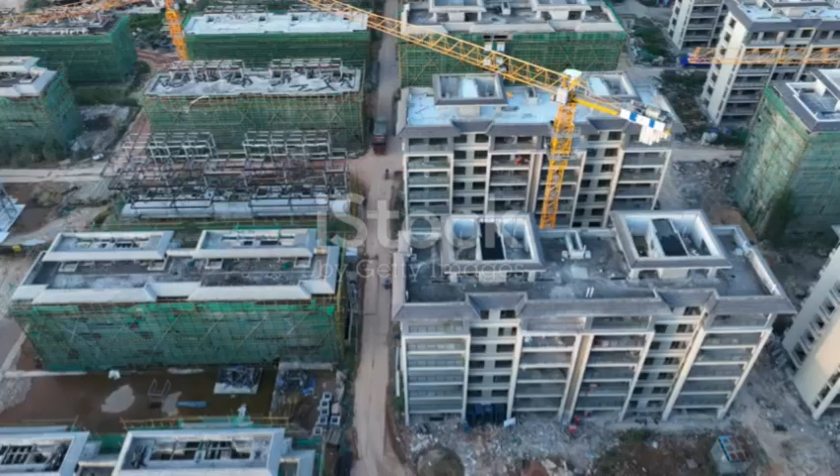Have you ever looked at a towering skyscraper or a massive bridge and wondered, how on earth did they build that? It's a brilliant question, and honestly, the answer is all around us. It's called construction engineering. This isn't just about mixing cement or laying bricks. It's really the science and art of turning an idea on a piece of paper into a solid, safe, and useful structure that we can all live in, work in, or drive across.

It's the grand plan that ensures our buildings don't fall down, our bridges don't wobble, and our homes keep us warm and dry. Construction engineering is the invisible force that shapes the world we see every single day, from the smallest house on your street to the biggest stadium in the country.

Think of it like a massive, incredibly complex recipe. Before a chef even thinks about turning on the oven, they need a detailed list of ingredients and a step-by-step guide. Construction engineers are the master chefs of the building world. They figure out exactly what materials are needed, how strong they must be, and the precise order in which everything must be put together. They work with architects, who design how a building looks, to make sure that beautiful design is also strong and practical.

They are the problem solvers who make sure a vision becomes a reality, safely and efficiently, ensuring that every single part works in perfect harmony with the rest. Without these clever engineers, our cities would look very different. We wouldn't have the incredible structures that define our skylines or the essential infrastructure that makes our lives easier. Every road, tunnel, dam, and airport is a testament to their skill.

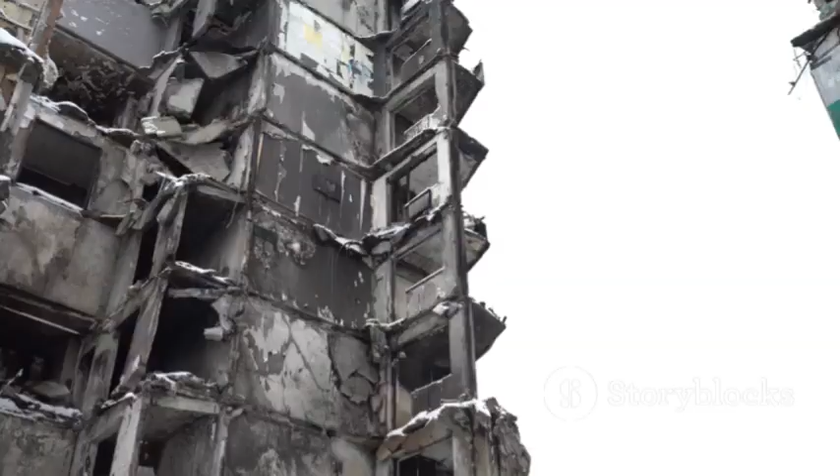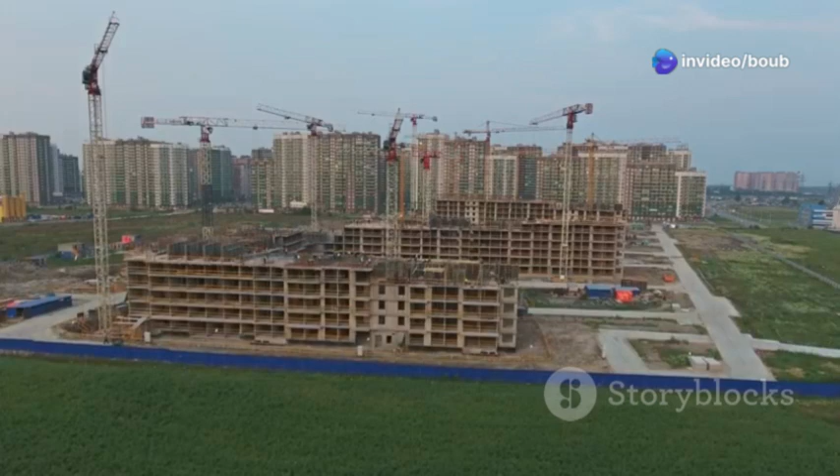So, why is this so important? Well, imagine a world without it. We'd be living in structures that might not withstand a strong gust of wind or a heavy downpour. Our cities couldn't grow upwards, and we wouldn't have the complex networks that supply us with water and power. Construction engineering is the backbone of modern civilization. It provides the safe and reliable framework for our society to function and flourish.

It's the essential link between a brilliant idea and a physical, lasting legacy. It allows us to build bigger, safer, and more ambitious projects than ever before, constantly pushing the boundaries of what is possible.

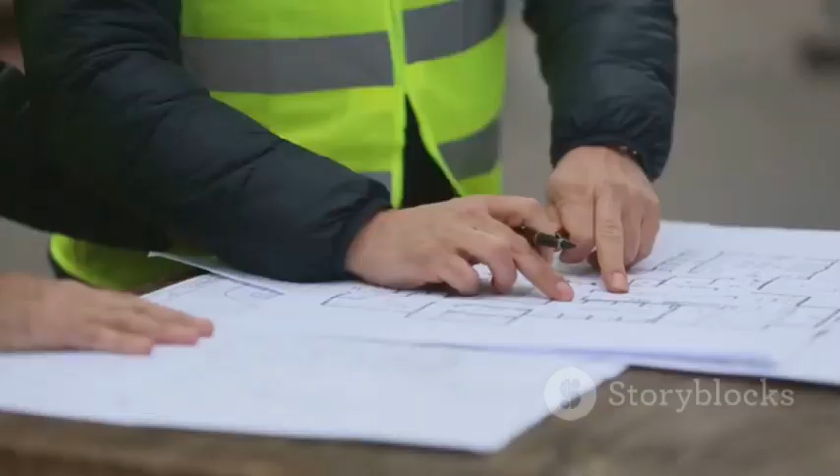Before a single shovel hits the dirt, a building has already been built many times over, but not with steel and concrete. It's built with data, lines, and pixels. This is the planning and design stage, the crucial first step where every single detail is meticulously thought out. Traditionally, this was all done with enormous sheets of paper covered in complex lines and numbers, known as blueprints or engineering drawings. These drawings are like the building's DNA, containing all the information needed to construct it.

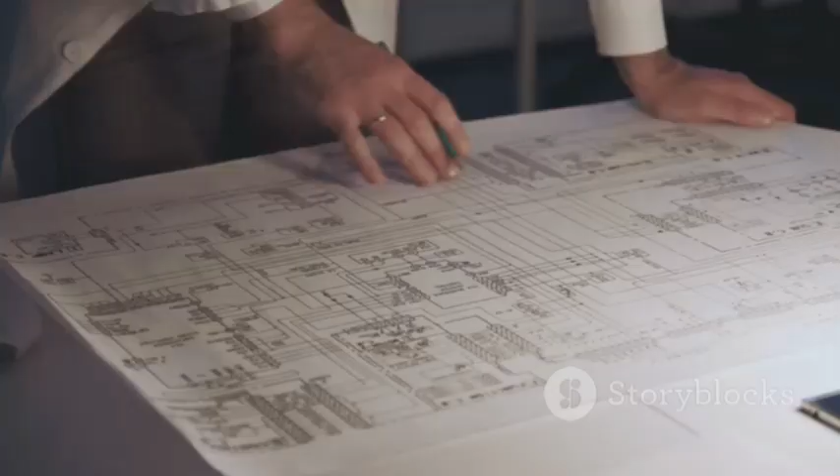They show the exact dimensions of every room, the position of every door, and the thickness of every wall. It's a universal language that all construction professionals understand. These drawings are incredibly detailed. There isn't just one master plan. There are many different sets. One set will show the architectural design, the look and feel of the building.

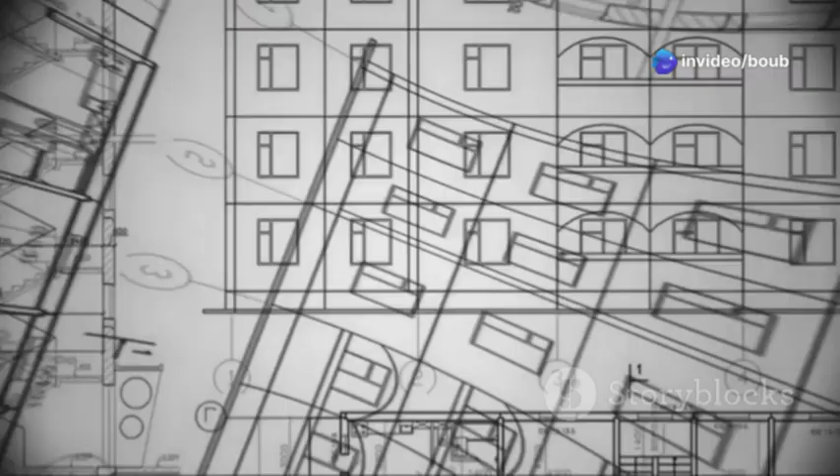Another set, created by structural engineers, will detail the skeleton of the building, the columns and beams that hold it up. Then there are drawings for the electrical systems, the plumbing, and the heating and ventilation. Each drawing is a layer of information, and when you put them all together, you get a complete picture of the final product. It's a painstaking process that requires immense precision, as a tiny mistake on paper could become a huge, expensive problem on the construction site.

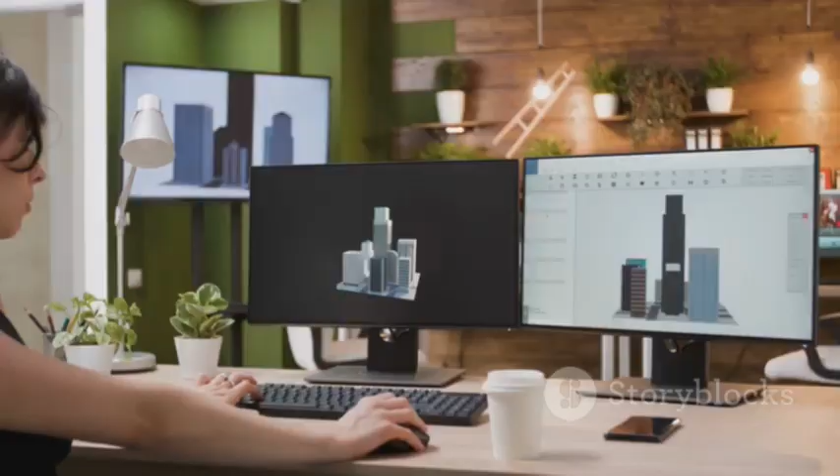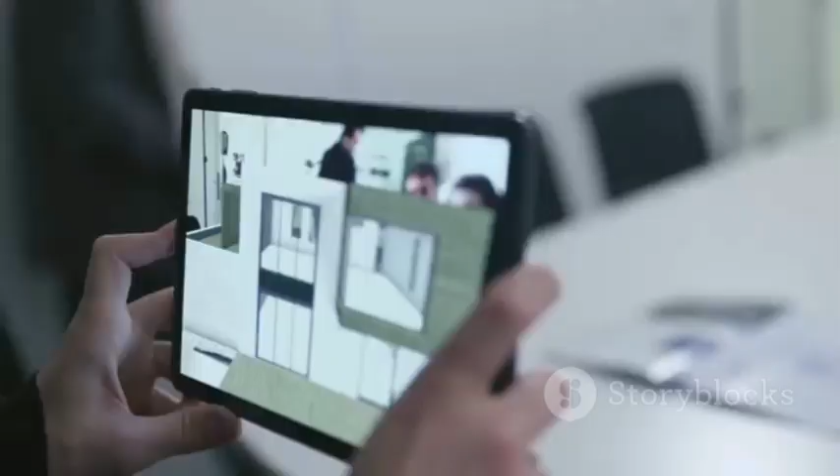But today we have something even better than paper. We have the magic of three-dimensional technology. Instead of trying to imagine a three-dimensional building from flat, two-dimensional drawings, engineers can now create a fully interactive three-dimensional model on a computer. This is a game changer. It's like having a digital, transparent version of the building right in front of you. You can spin it around, look at it from any angle, and even zoom in to see how the tiniest components fit together.

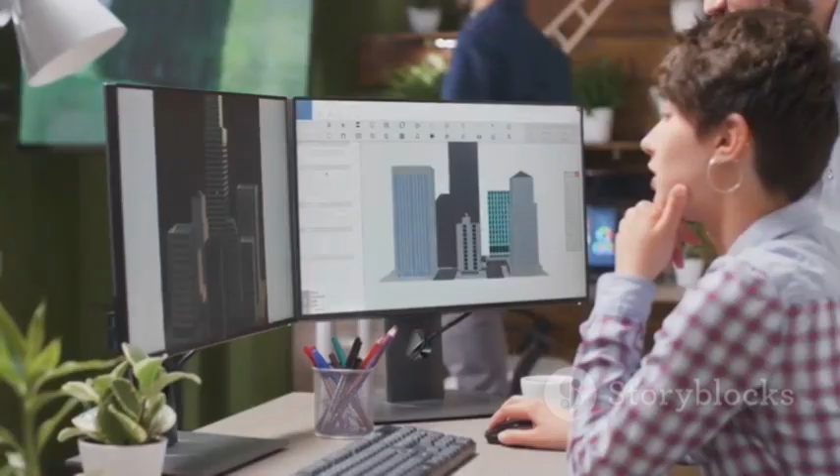This technology is often called Building Information Modeling, or BIM, and it has revolutionized the planning process. Using these three-dimensional models, engineers and architects can take a virtual walk through the building long before construction starts. They can check for any potential clashes, like a water pipe running through the same spot as an electrical conduit, a common problem that used to cause major delays. With a three-dimensional model, these issues can be spotted and fixed with just a few clicks of a mouse.

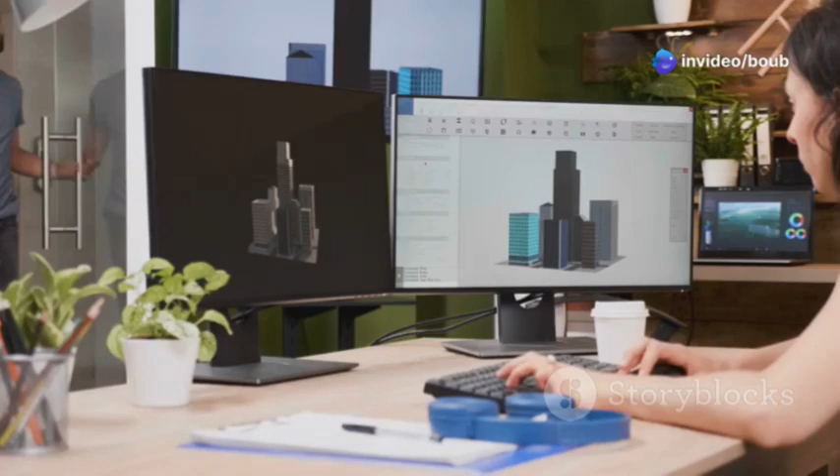It allows everyone involved in the project, from the client to the construction manager, to see exactly what the finished building will look like and how it will function. This incredible foresight saves time, reduces waste, and helps create better, more efficient buildings.

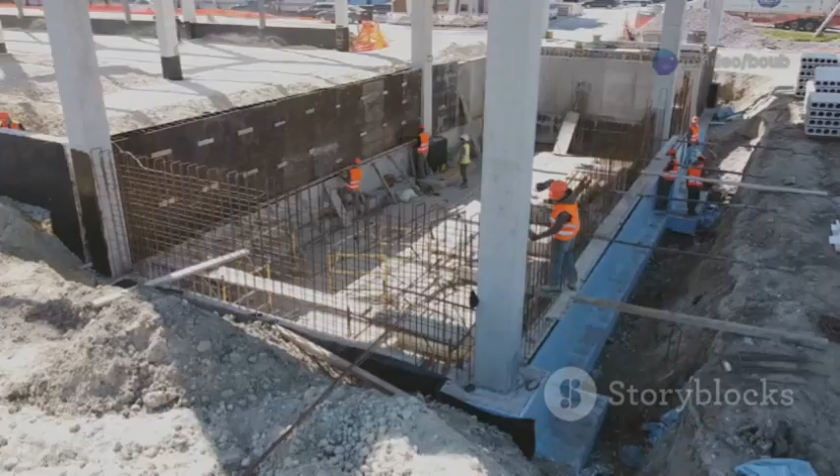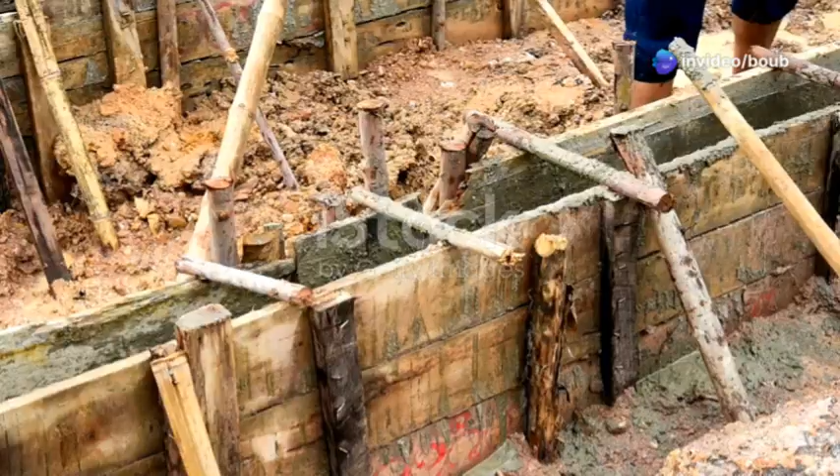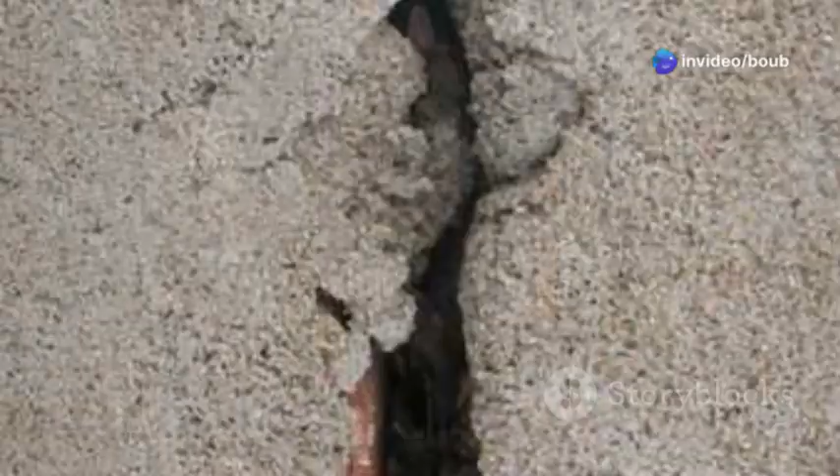Every great structure, no matter how tall or magnificent, relies on something you almost never see: its foundation. The foundation is the critical link between the building and the earth. Its job is to take the entire weight of the building, every floor, every wall, every piece of furniture, and every person inside, and transfer that massive load safely into the ground. If the foundation is weak, the entire building is at risk.

That's why engineers spend so much time studying the ground on which they are about to build. They take soil samples and conduct tests to understand its strength and stability, ensuring the ground can support the immense pressure. There are different types of foundations, and the one an engineer chooses depends on the size of the building and the type of soil.

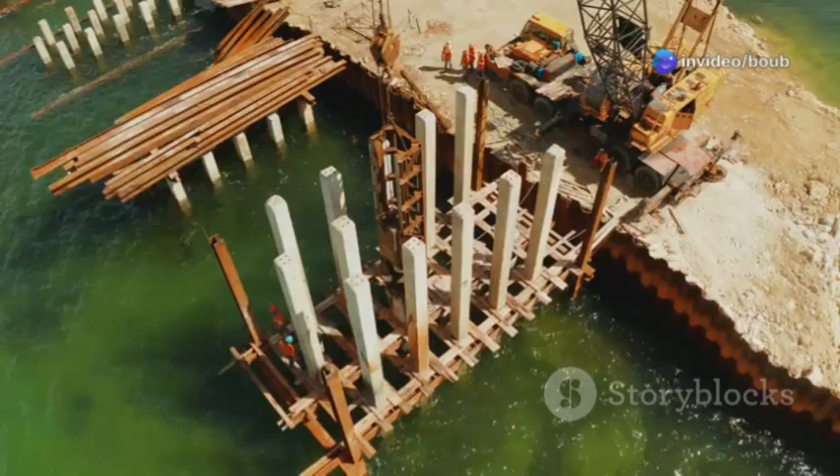For a typical house, you might have a shallow foundation, like a concrete slab or strip footings. These spread the weight of the house over a wide area, just like snowshoes help you walk on snow without sinking. But for a towering skyscraper, you need something much, much bigger. These giants require deep foundations, which act like long legs that reach deep into the ground until they hit solid rock or a very stable layer of soil. These are often made of massive concrete pillars called piles.

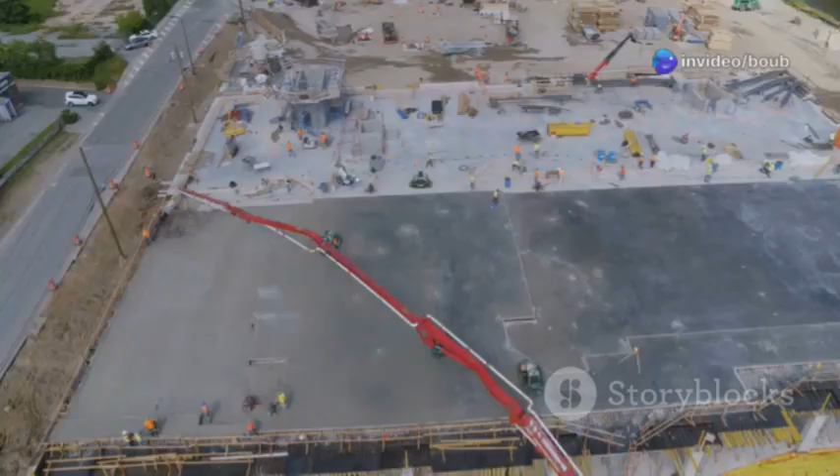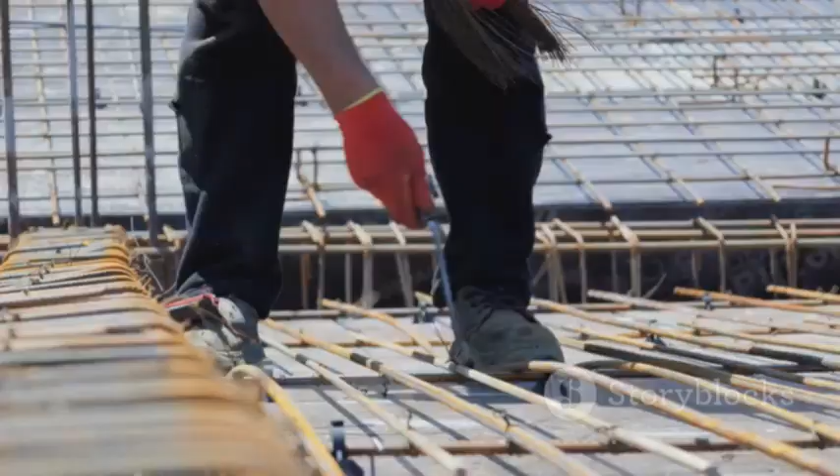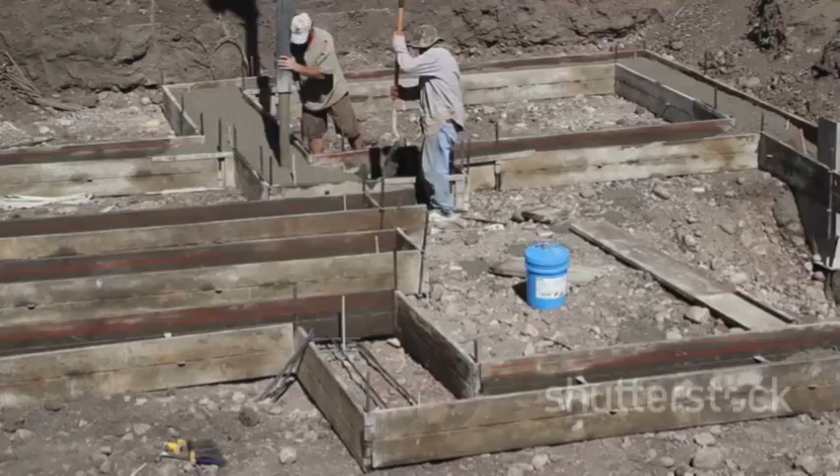The process of building a foundation is honestly a marvel of engineering. First, a large hole is excavated. Then, a strong cage of steel bars, known as rebar, is carefully assembled. This steel skeleton provides tensile strength, which is the ability to resist being pulled apart. Concrete, on the other hand, is incredibly strong under compression, or being squeezed. When you combine steel and concrete, you get reinforced concrete, a super material that is perfect for foundations.

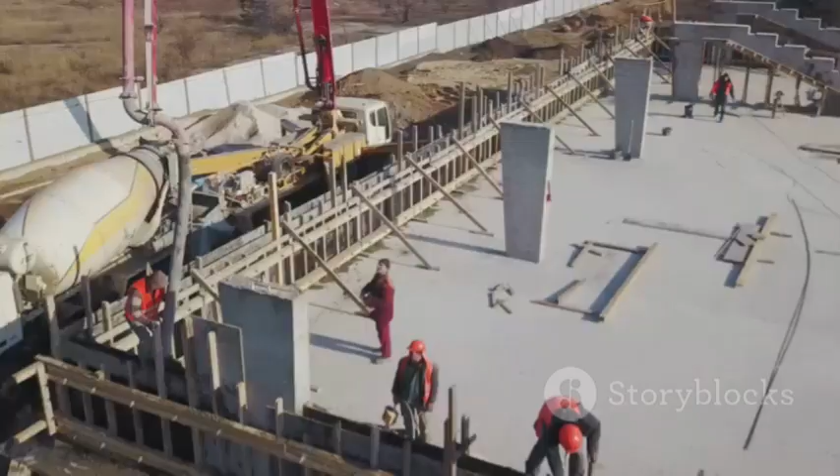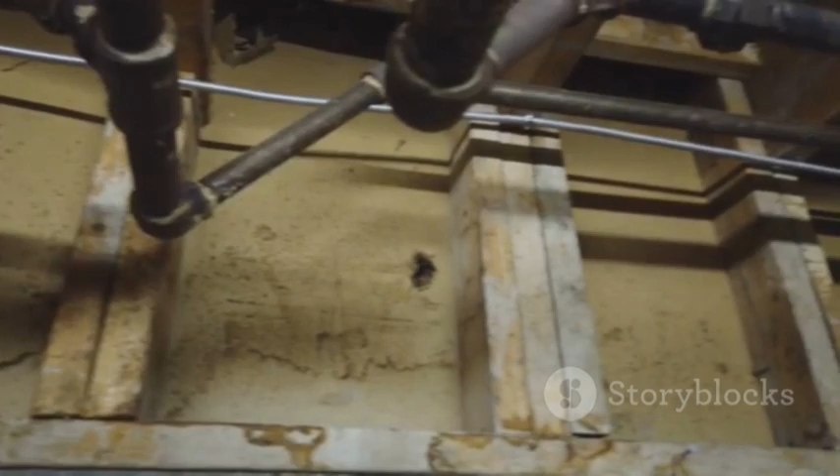Once the steel cage is in place, wet concrete is poured in and around it, filling every gap. The concrete then has to cure, a chemical process where it hardens and gains its immense strength. This stage is absolutely crucial, and there is no room for error. A poorly constructed foundation can lead to all sorts of problems later on, from cracked walls to an uneven building. It's the anchor of the entire project.

Think of the famous Leaning Tower of Pisa. Its iconic tilt is the result of a foundation that was too shallow for the soft ground beneath it. Modern construction engineers learn from these historical examples, using advanced calculations and soil analysis to design foundations that will stand firm for centuries. It's the unseen hero of every building, providing the solid, unwavering base upon which everything else is built.

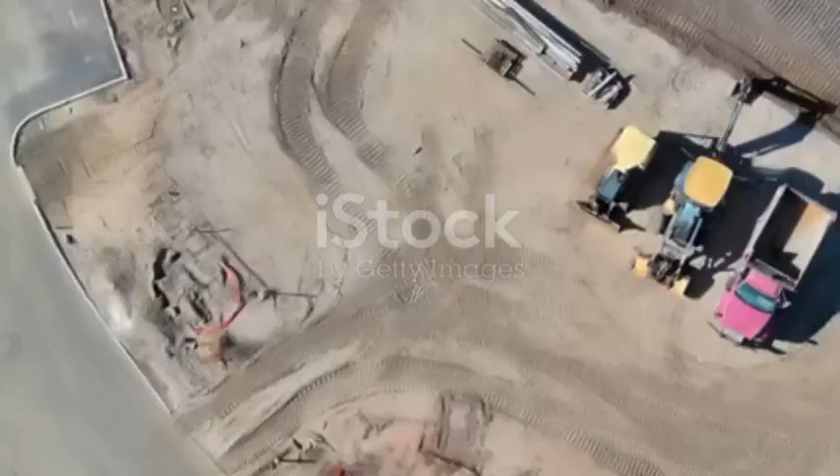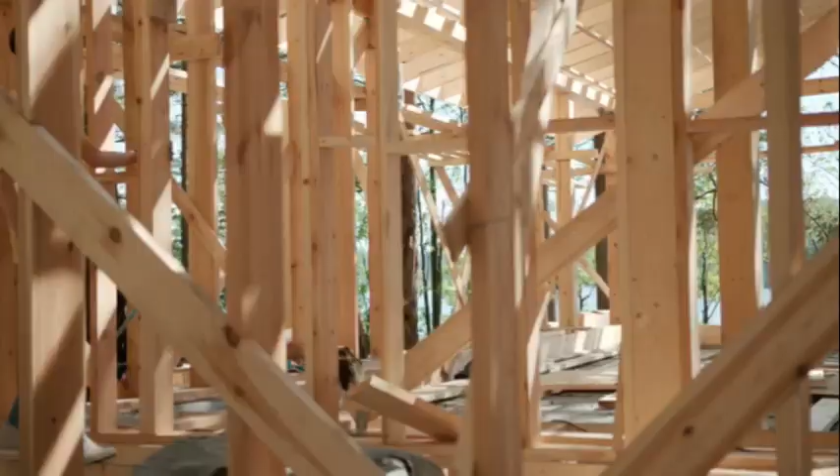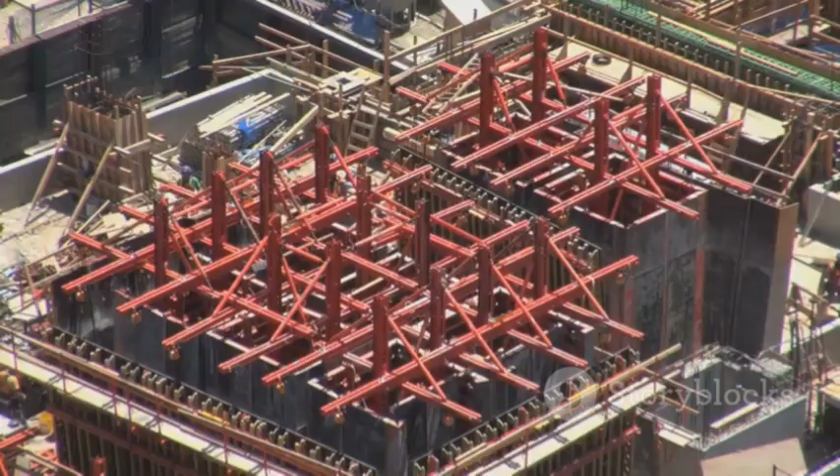Once the foundation is solid and ready, the building begins its journey upwards. This is where we see the skeleton of the building, its structural frame, take shape. This frame is the primary support system, responsible for holding the building up against gravity and resisting other forces like wind or even earthquakes. Just like our own skeletons support our bodies, the structural frame supports every floor, wall, and the roof. For most large buildings, this frame is made from two key materials, steel or reinforced concrete. The choice between them depends on the building's design, height, and the specific needs of the project.

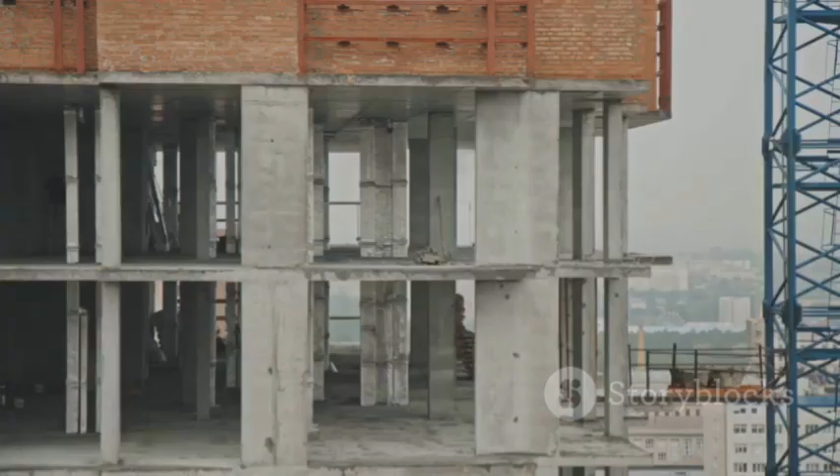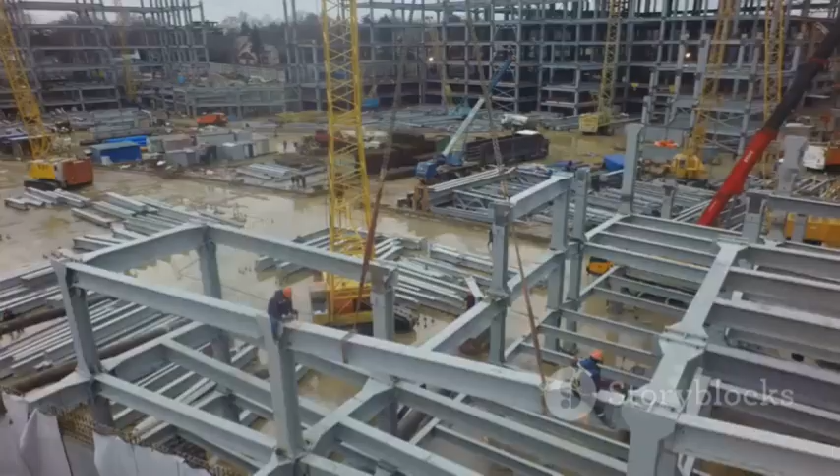The building blocks of this skeleton are columns and beams. Columns are the vertical pillars that stand tall, transferring the weight from the floors all the way down to the foundation. You can see them in large open spaces like parking garages or office building lobbies. Beams are the horizontal members that span between the columns. Their job is to support the weight of the floors and transfer that load sideways to the columns. Together, columns and beams form a grid-like structure, a strong and rigid framework that creates the shape of the building and the open spaces within it.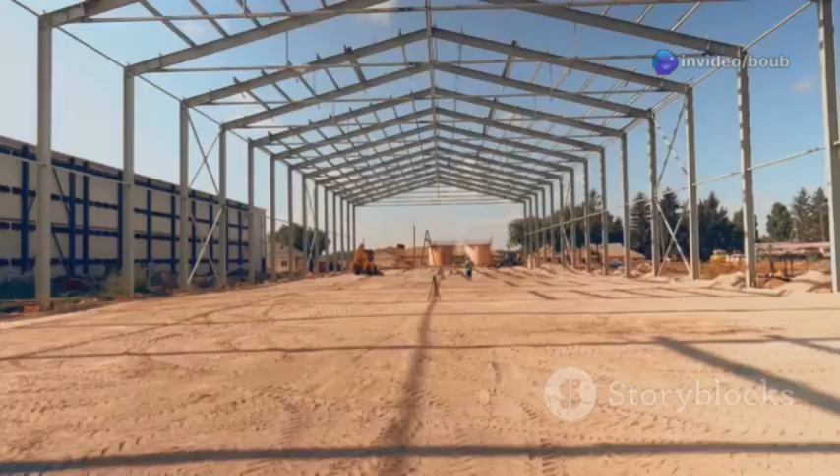It's a simple but incredibly effective system. The assembly process is kind of like putting together a giant high-tech construction set. If the frame is steel, massive steel beams and columns are manufactured in a factory to precise specifications. They are then transported to the site and lifted into place by towering cranes. Skilled ironworkers then bolt or weld these huge pieces together, working at incredible heights with amazing precision.

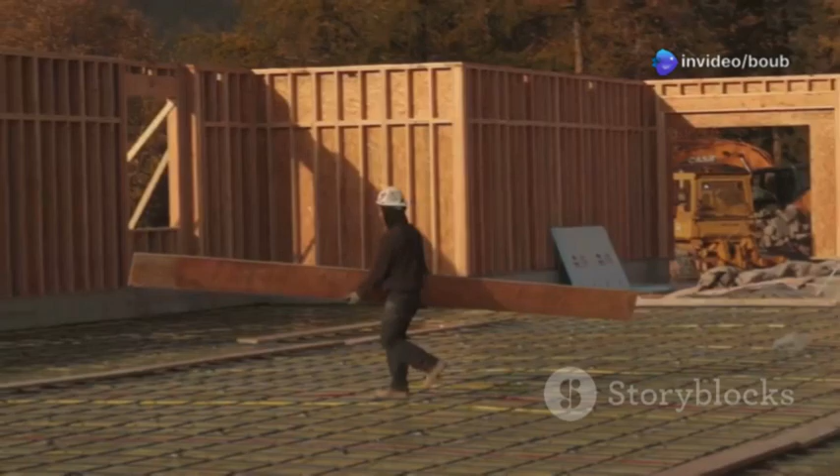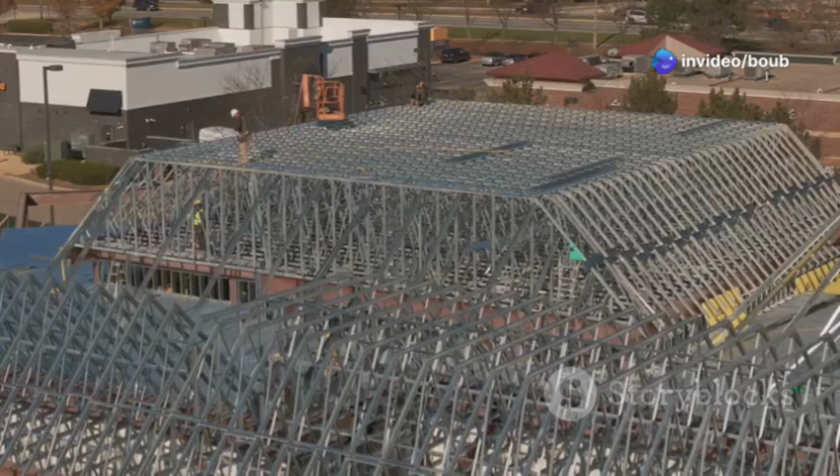If the frame is reinforced concrete, wooden or metal molds called formwork are built on site. Steel rebar cages are placed inside the formwork, and then concrete is pumped in. Once the concrete cures, the formwork is removed, revealing a solid column or beam. This stage of construction is often the most dramatic. It's when the building grows rapidly, and you can finally see its size and shape emerging from the ground.

Engineers use highly detailed three-dimensional models to plan the exact sequence of this assembly. They can simulate the entire process on a computer, ensuring that each piece fits perfectly and that the structure remains stable at every stage of construction. This careful planning is essential for safety and efficiency, making sure that the building's strong and resilient skeleton is built correctly, piece by piece, as it reaches for the sky.

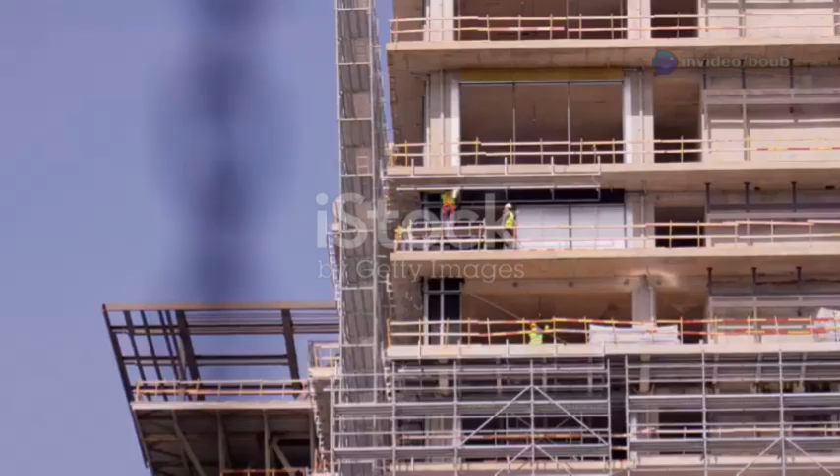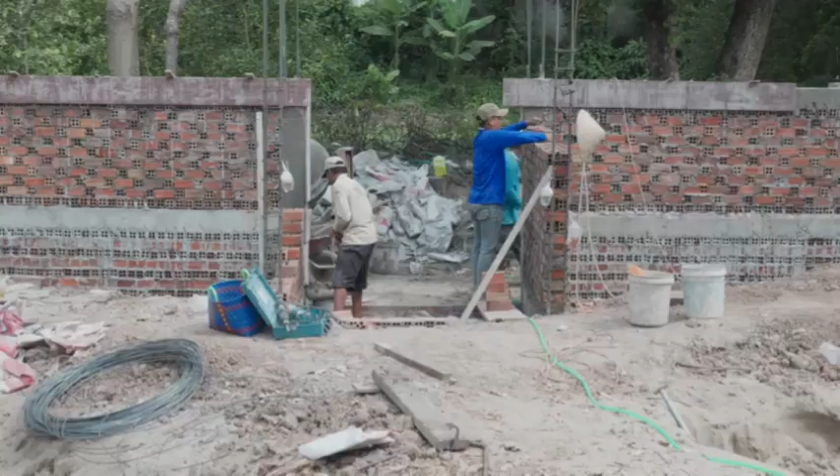With the sturdy skeleton of the building in place, it's time to give it some skin. This is where walls come in. We often think of walls as simple dividers that create rooms, but in construction engineering they play several vital roles. There are two main types of walls: load-bearing walls and non-load-bearing walls. Load-bearing walls are part of the building's structural system. Just like columns, they help to carry the weight of the floors and the roof above and transfer it down to the foundation. In many smaller buildings, like houses, the exterior walls are often load-bearing, made from materials like brick, concrete blocks, or reinforced concrete.

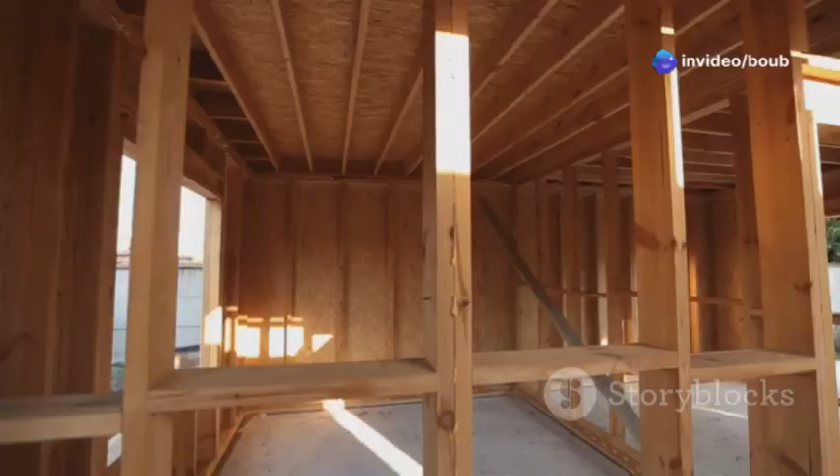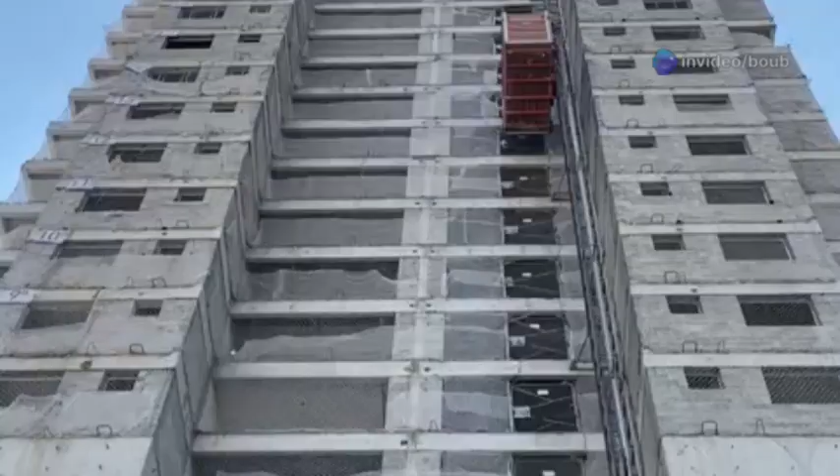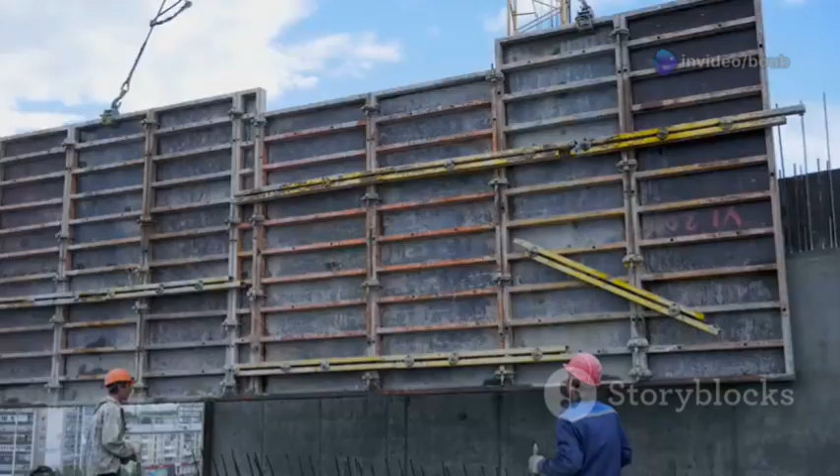Non-load-bearing walls, on the other hand, are primarily there to define spaces. They don't carry any weight from the structure above them. They only have to support their own weight. These are often the interior walls that separate your living room from your kitchen or your bedroom from your bathroom. In large steel frame buildings, even the exterior walls are often non-load-bearing. These are called curtain walls. They are like a skin or a curtain that hangs off the structural frame, keeping the weather out and giving the building its finished look. These can be made of glass, metal panels, or precast concrete.

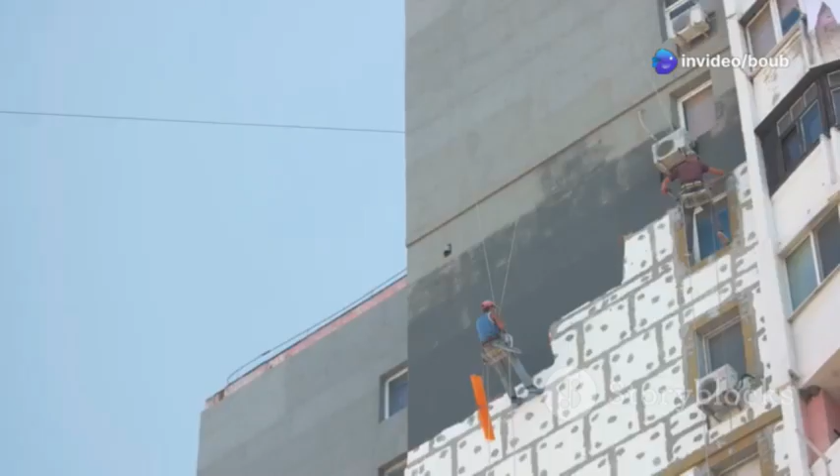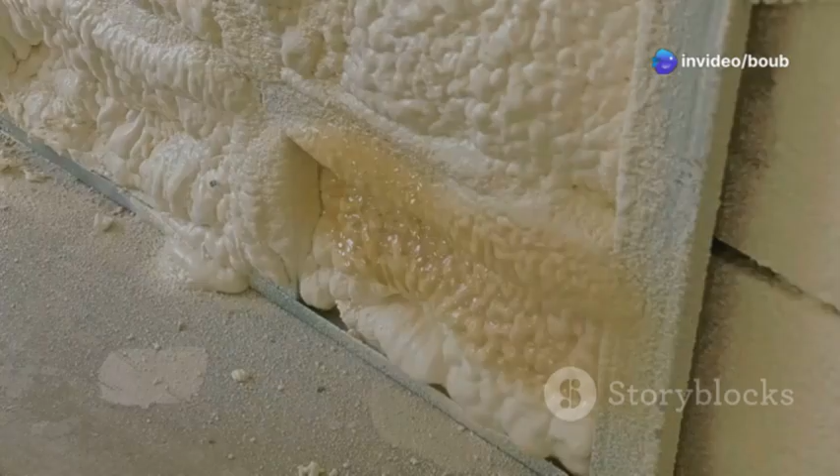But a wall is much more than just a single layer of material. Modern walls are complex, multi-layered systems designed for performance. The outer layer, known as the cladding, is the building's first line of defense against rain, snow, and wind. Behind that, there is often a weather-resistant barrier to stop any moisture that gets past the cladding. Then comes a thick layer of insulation, which is crucial for keeping the building warm in the winter and cool in the summer. This helps to make the building energy efficient, saving money on heating and cooling bills. It's like putting a warm coat on the building.

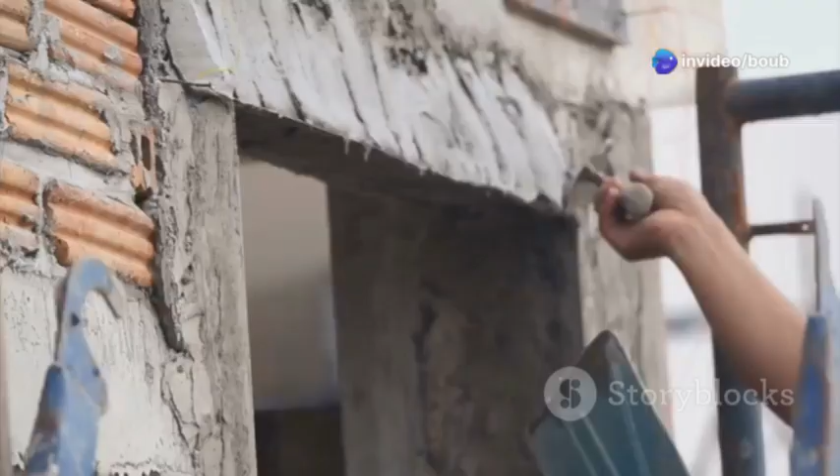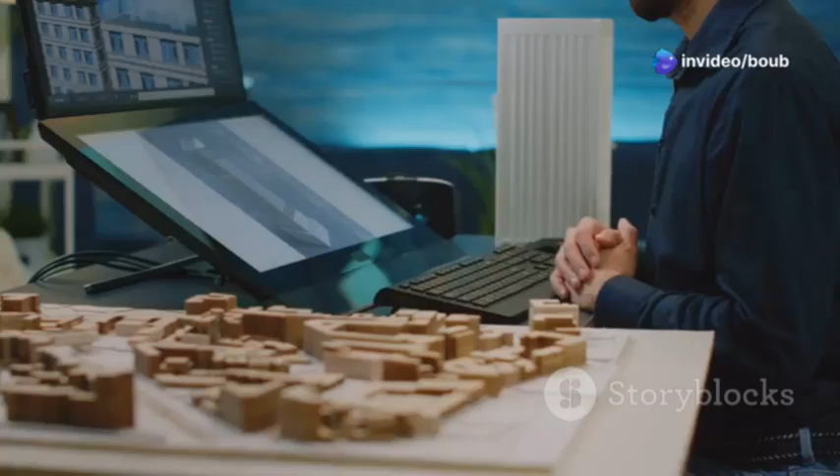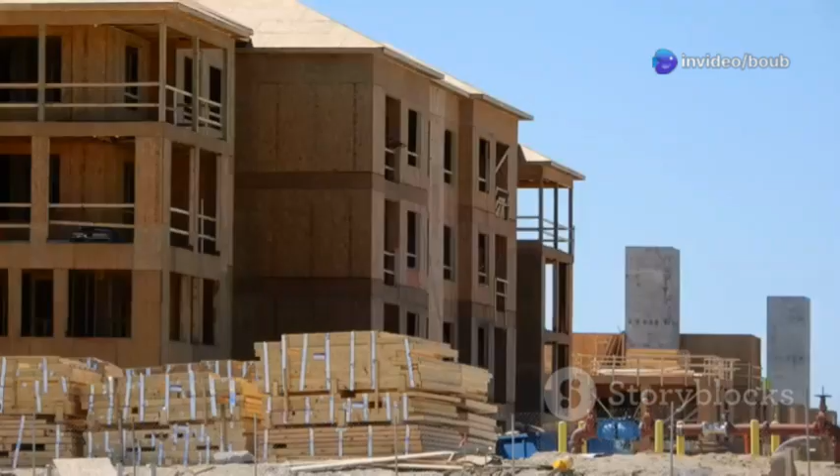Finally, you have the interior finish, which is the surface you see and touch inside the room, usually drywall or plaster. Within the cavity of the wall, there's a hidden world of pipes for plumbing and wires for electricity. Engineers and architects use three-dimensional models to meticulously plan the layout of these systems within the walls, ensuring everything fits without conflict. So, the next time you look at a wall, remember it's not just a simple divider. It's a sophisticated, engineered system that provides structure, protection from the weather, thermal comfort, and a home for the essential services that make a building functional.

The final major piece of the structural puzzle is the roof. The roof is the building's ultimate protector, its shield against the elements. Its primary job is to keep rain, snow, and sun out of the building, but it also plays a significant role in the building's overall stability and energy efficiency. Just like foundations and walls, roofs come in many shapes and sizes, from the simple pitched roofs you see on houses to the vast flat roofs found on commercial buildings and factories. The design of the roof depends on the climate, the style of the building, and the materials being used. The structure of the roof is built on top of the building's main frame.

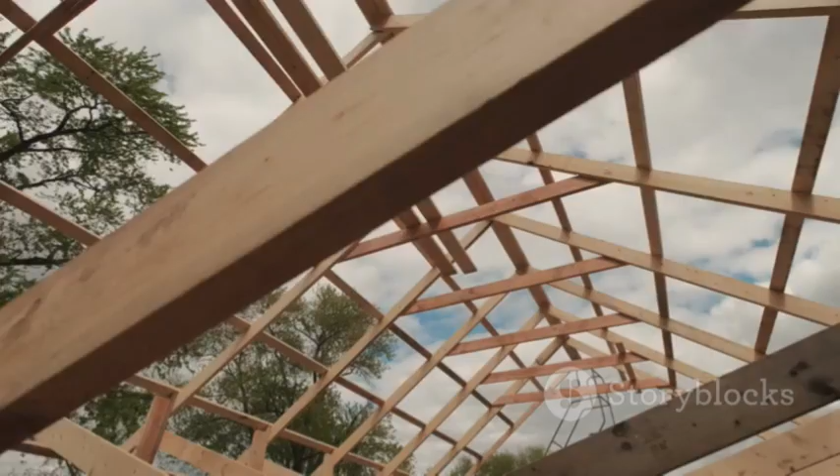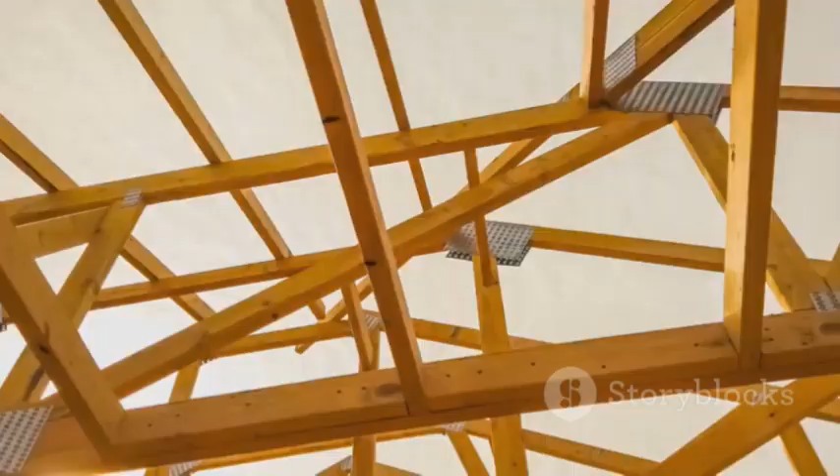For pitched roofs, this structure is typically made of a series of triangular frames called trusses. The triangle is an incredibly strong shape, which makes it perfect for spanning large distances and supporting the weight of the roofing materials and even heavy snow. These trusses are often made of wood for houses or steel for larger buildings.

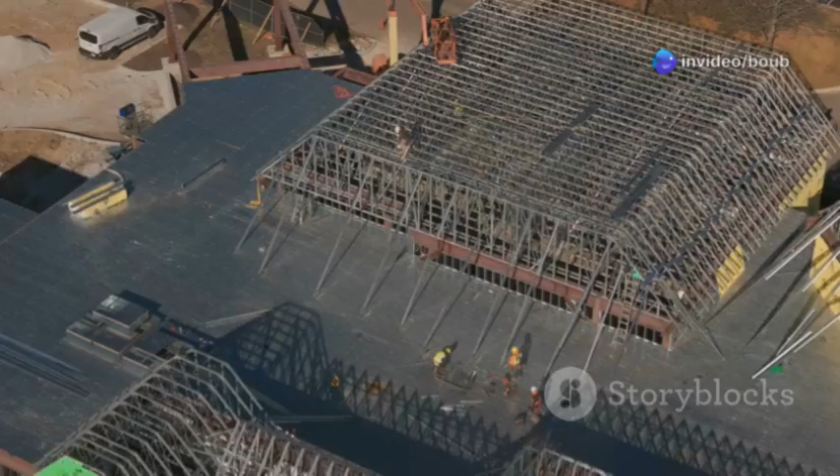For flat roofs, the structure is usually made of horizontal beams, similar to the ones used for the floors, designed with a very slight slope to allow water to drain away. Once the roof structure is in place, it needs to be covered. This involves several layers, each with a specific job. First, a layer of sheathing, usually plywood or a similar board, is laid over the trusses or beams. This creates a solid surface.

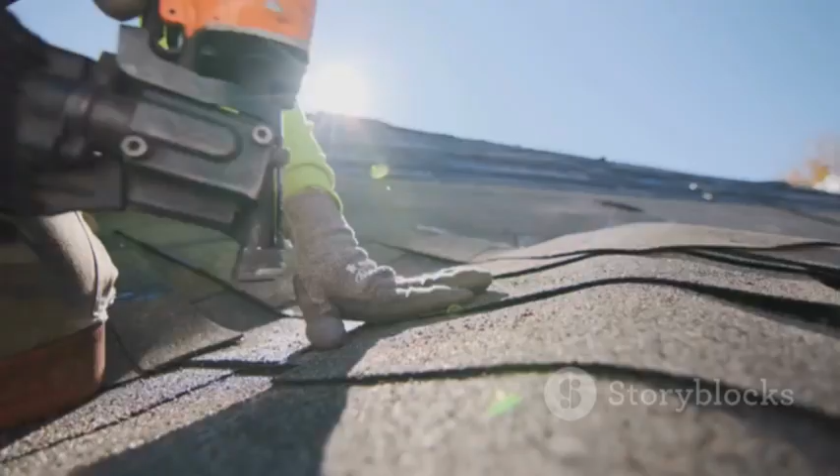On top of that goes a waterproof membrane called an underlayment. This is a critical secondary barrier that catches any water that might get past the final roofing material. It's like wearing a waterproof jacket under your coat on a very rainy day. This layer is essential for preventing leaks and protecting the structure below from water damage.

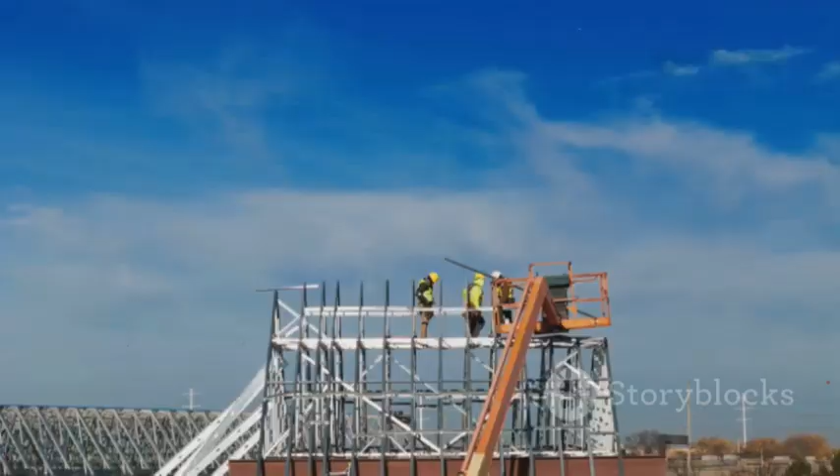The final layer is the visible part of the roof, the material that faces the sky. This could be anything from traditional clay tiles or slate to asphalt shingles, metal sheeting, or even a living green roof with plants. The choice of material affects the building's appearance, its durability, and its cost. Engineers must ensure that the roof structure is strong enough to support the chosen material. Putting a heavy slate roof on a frame designed for lightweight shingles would be a recipe for disaster.

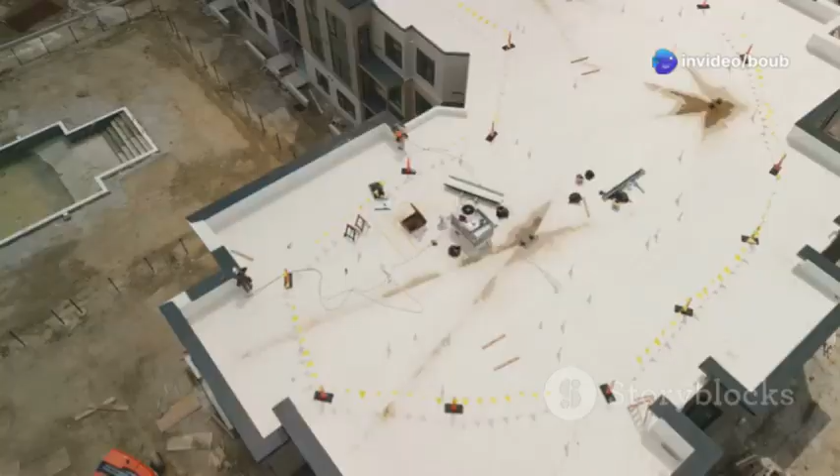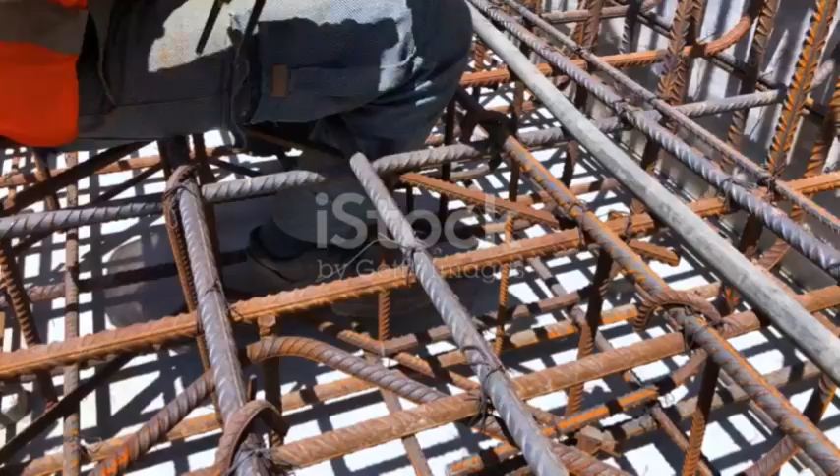The roof is the crown of the building, and its careful construction ensures the entire structure beneath it stays safe, dry, and protected for many years to come. Building a structure is not just about making individual parts, it's about how those parts connect and work together as a single unified system. This is the art of assembly, a complex dance of logistics and precision engineering.

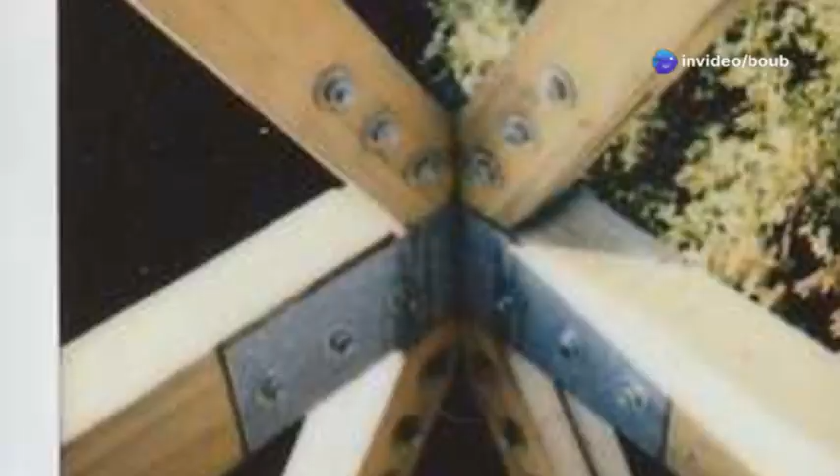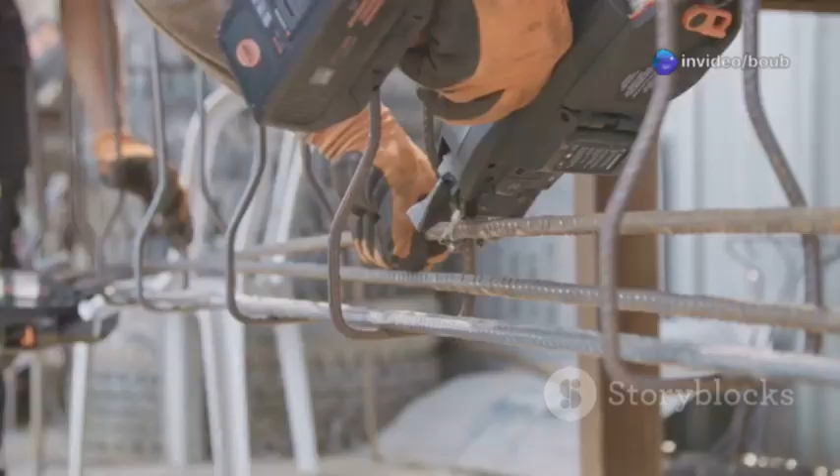Every connection point, from where a beam meets a column to where a wall meets the foundation, is a critical point of stress. Engineers design these connections with extreme care, using detailed calculations to ensure they are strong enough to handle all the forces they will experience throughout the building's life. A building is only as strong as its weakest link, and these connections are often where the greatest challenges lie.

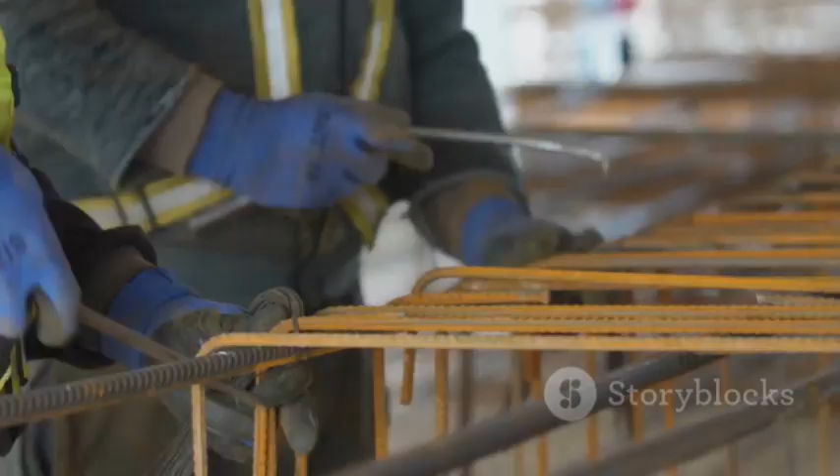Think about how different materials are joined together. Steel beams are connected to steel columns using heavy-duty bolts or by welding them together to form a seamless joint. When a concrete beam meets a concrete column, the steel reinforcement bars, rebar, from each part are overlapped and tied together before the concrete is poured. This creates a continuous steel skeleton embedded within the concrete, allowing forces to flow smoothly through the joint.

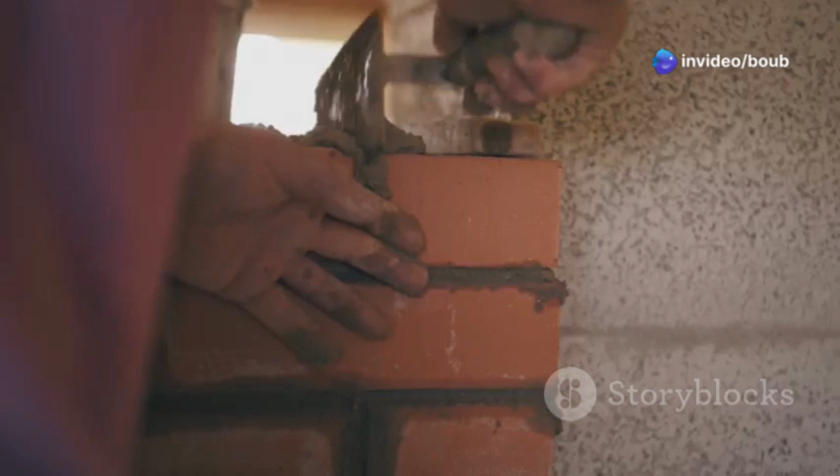Even the connection between a brick wall and a concrete foundation requires special ties and mortars to ensure they are bonded securely and can move slightly without cracking. This process of assembly is where three-dimensional modeling truly shines. Before construction, engineers can use BIM software to create a detailed digital twin of the entire building. They can zoom in on every single connection and see exactly how it is meant to be assembled.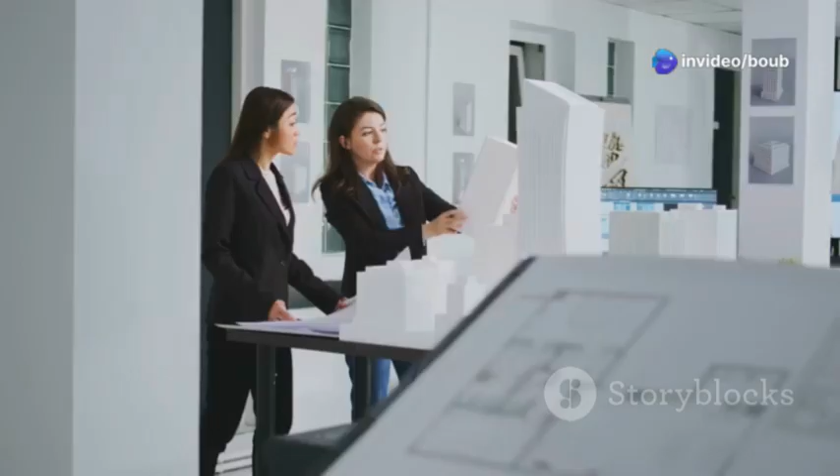They can create step-by-step animated instructions for the construction crews, showing the precise sequence for lifting and fastening each component. This level of virtual planning helps to identify potential assembly problems before they happen on site, preventing costly delays and dangerous mistakes. It ensures that the thousands of individual pieces come together exactly as planned.

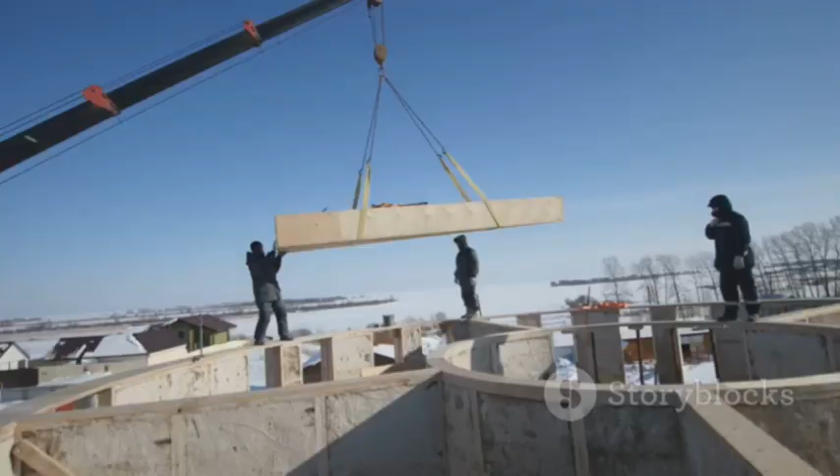From the ground up, the building is a system of interconnected parts, each relying on the others. The foundation anchors the columns. The columns support the beams, the beams hold up the floors, the walls enclose the space, and the roof protects it all. Every element is designed to transfer loads down a specific path, safely into the ground.

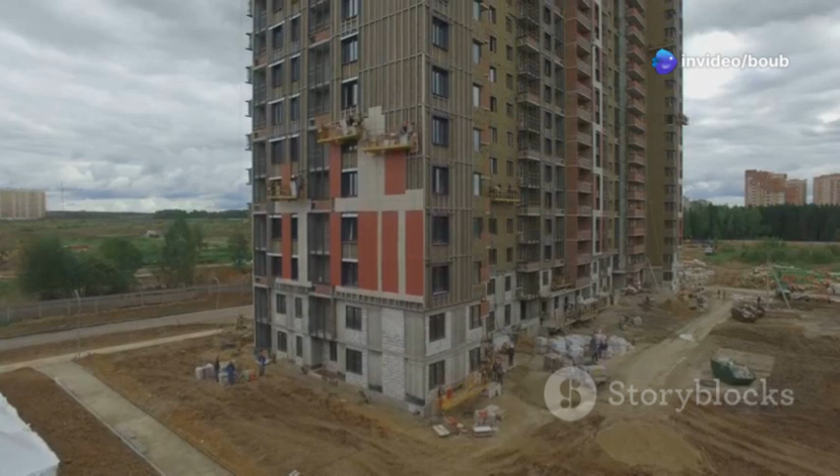It's a carefully orchestrated chain of command. Understanding how all these parts fit and work together is the essence of construction engineering. It's about seeing not just the individual bricks and beams, but the entire magnificent system as a whole.

The principles of construction engineering are not just theories in a textbook. They are the reason we have some of the most breathtaking structures on Earth. Take the Burj Khalifa in Dubai, the tallest building in the world.

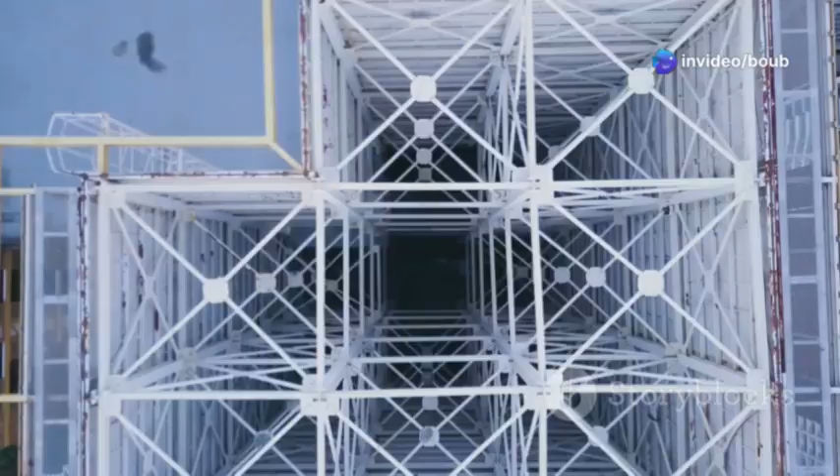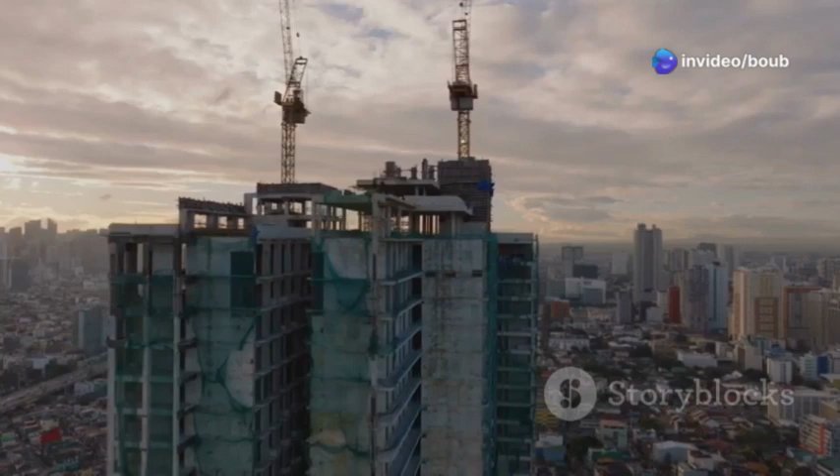To stand that tall, engineers had to design a unique Y-shaped foundation and structure to resist the powerful desert winds. They used a buttressed core, a strong central pillar supported by 3 wings. This design was perfected using advanced computer simulations and wind tunnel tests long before the first piece of steel was put in place. The building is a towering example of how engineering pushes the limits of what is possible.

Another incredible example is the Millau Viaduct in France, one of the tallest bridges in the world. Its slender, elegant towers and cables look almost delicate, but they are the product of incredible engineering. Engineers had to design a structure that could withstand high winds sweeping through the valley below.

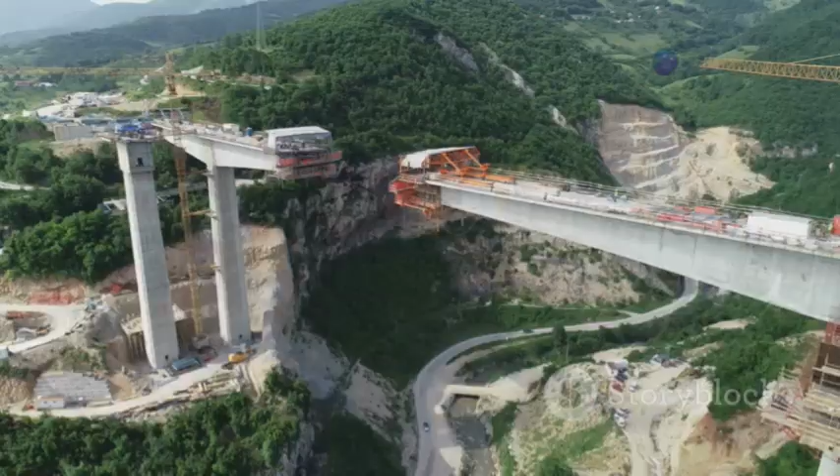The bridge deck was actually built on the ground and then slid out horizontally across the valley, section by section, a monumental feat of construction planning. Three-dimensional models were essential for this process, allowing engineers to plan every move with millimeter precision and ensure the bridge remained stable during this risky phase of construction.

This is where three-dimensional technology becomes more than just a planning tool. It becomes a way for everyone to understand the project. With a three-dimensional model, clients who may not be able to read complex blueprints can take a virtual tour of their future building. They can see what the view will be like from their office window, or how sunlight will move through a room during the day. This helps them make better decisions and feel more connected to the project.

For the construction team, it provides an unambiguous guide, reducing misinterpretations and errors on site. It's like having an interactive instruction manual for a billion-dollar project. These technologies allow us to visualize the unseen.

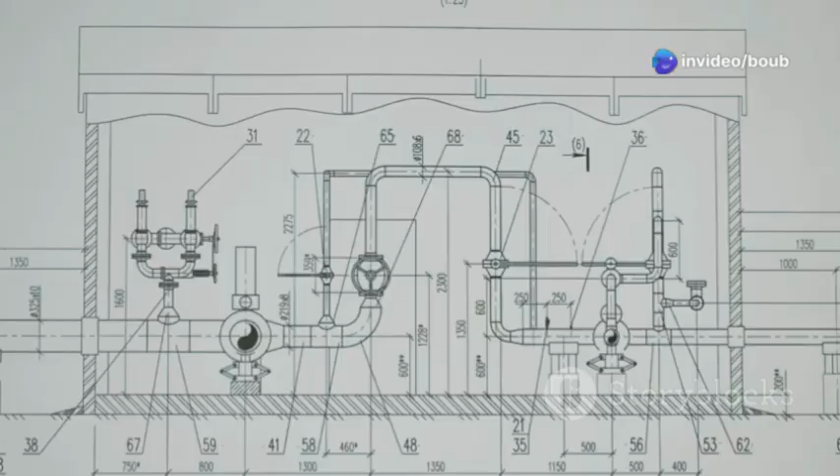Engineers can use three-dimensional models to show how the hidden network of pipes, ducts, and wires will be installed inside the walls and ceilings. They can run simulations to see how the building will perform in an earthquake or how people would evacuate in an emergency.

This ability to see and test the building in the virtual world before creating it in the real world is one of the biggest advancements in the history of construction. It leads to safer, more efficient, and more sustainable buildings, turning ambitious digital dreams into solid physical reality.

As we've journeyed from the initial spark of an idea to the final placement of the roof, one thing has become clear. Construction engineering is the essential craft that builds our modern world. It is a discipline that blends the creativity of design with the certainty of science.

It begins with careful planning, where every detail is mapped out, first on paper and now in sophisticated three-dimensional models that allow us to walk through a building before it even exists. This digital foresight is the first step in ensuring a project's success, saving time, money, and preventing problems down the line.

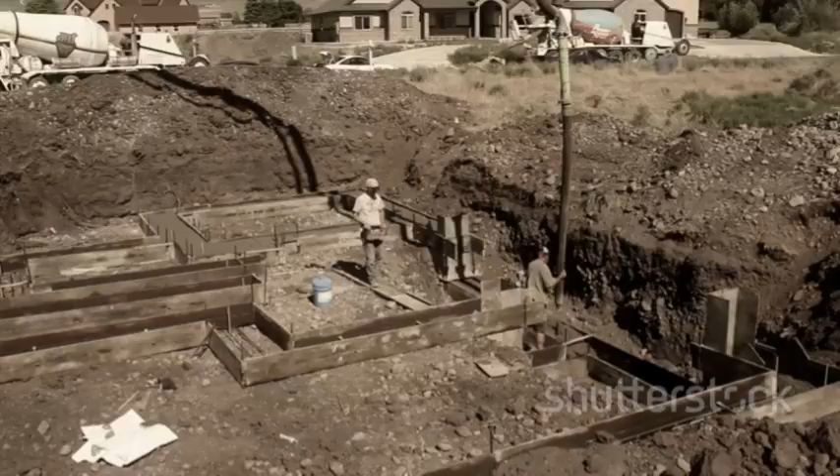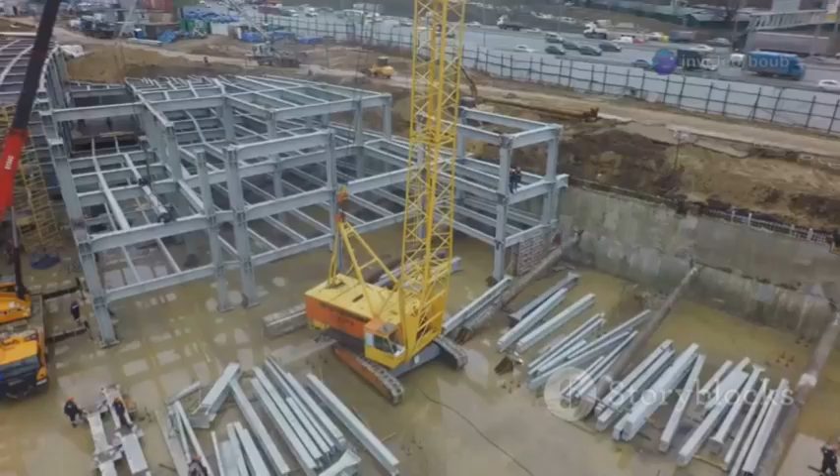We then move to the physical realm, starting with the most critical and often unseen element, the foundation. This solid base, scientifically designed for the specific ground it rests on, is what gives a building its strength and stability. From there, the structural frame of columns and beams rises, a skeleton of steel or concrete that defines the building's form and carries its weight.

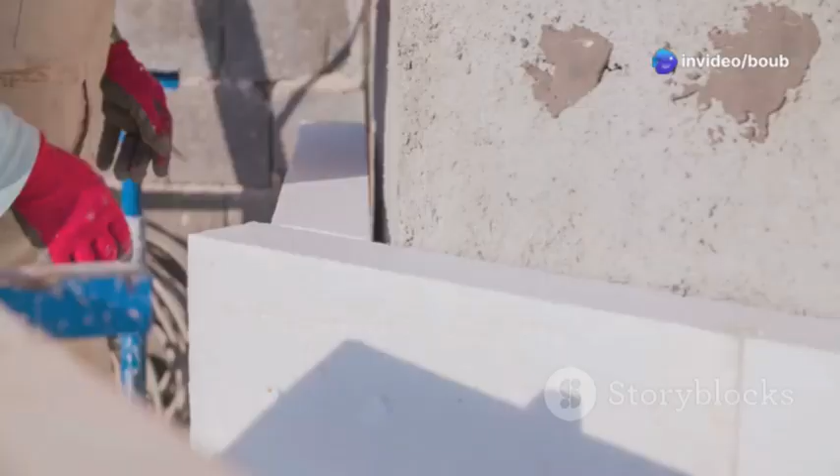Then come the walls and the roof, the building's skin and shield, which are not just simple surfaces but complex systems designed for protection, insulation, and performance. Each step is a logical progression, building upon the last.

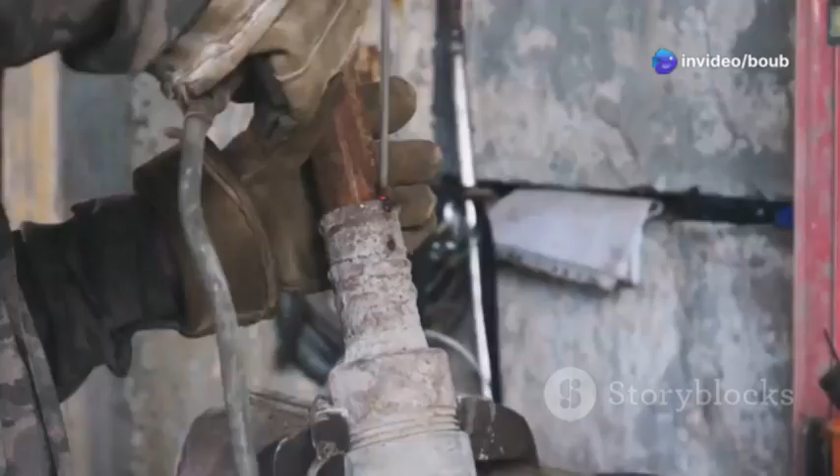The true genius of construction engineering lies in how all these different parts, foundation, frame, walls, and roof, are brought together. It is a symphony of connections, where thousands of individual components are assembled to act as one cohesive structure. Every bolt, every weld, and every joint is carefully designed to manage the immense forces at play.

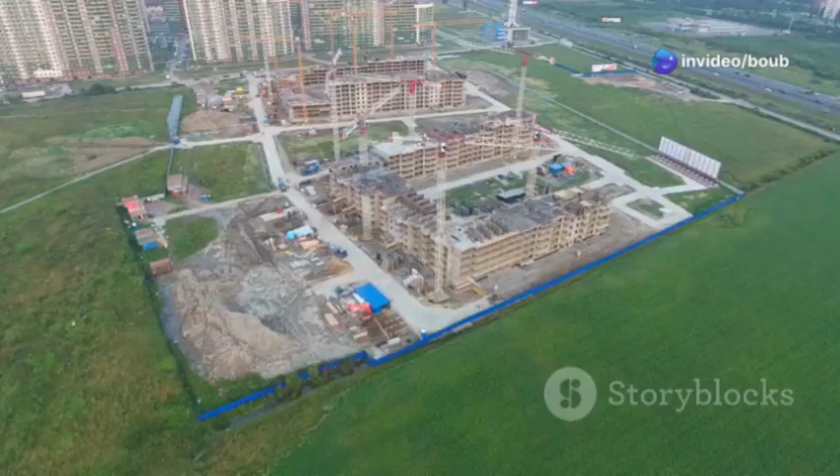This intricate process of assembly, guided by detailed plans and digital models, is what transforms raw materials into the safe, functional, and inspiring spaces where we live our lives. It's a testament to human ingenuity and our ability to cooperate on a massive scale.

Ultimately, construction engineering is about more than just buildings. It's about creating the future. The structures built today will stand for generations, shaping our communities and defining our landscapes. The engineers behind these projects carry a profound responsibility to build safely, sustainably, and with an eye toward the needs of tomorrow.

As technology continues to evolve, they will have even more powerful tools to design and build structures that are smarter, greener, and more resilient than ever before. It is a field that is constantly learning and improving, ensuring that the blueprint of our world is one of strength, safety, and endless possibility.